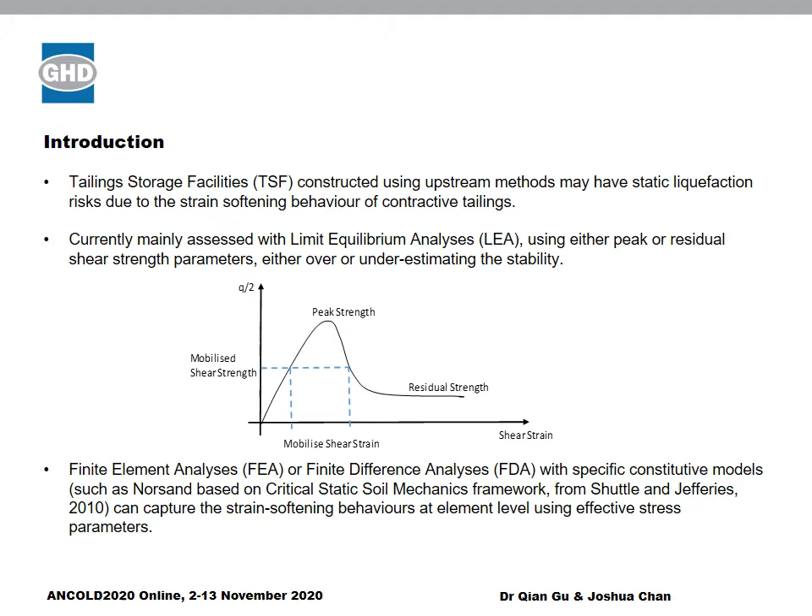The shear strength reduction method has been used by some finite element software packages to estimate the factor of safety values. Such method relies on progressively reducing the shear strength to trigger the loss of equilibrium. This process, however, cannot replicate the realistic strain and stress paths leading to failure. And considering the dependency of the engineering shear strength on actual stress and strain path, not considering the realistic path will mean that the actual factor of safeties under undrained conditions using effective stress parameters cannot be produced.

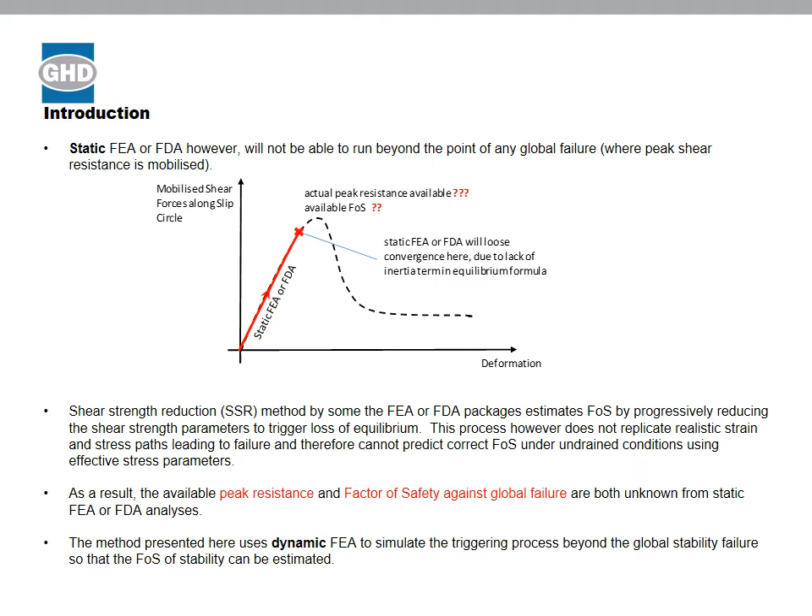The dynamic analysis has been undertaken using the software RS2, developed by Rocscience. The reason why this software is used instead of other more commonly used software such as FLAC and Plaxis is because of two things: first, this software is relatively user-friendly compared to FLAC; and secondly, compared to Plaxis, RS2 has got a NorSand model incorporated into it recently.

This is the cross-section used in the analysis. The TSF comprises a starter dam and 5 stages of subsequent raises. The current design also considered a smaller stage 1 buttress and a larger stage 2 buttress for increased stability.

The cross-section also shows a few locations along the embankment face, which will later on be used as output points to investigate the result. Also shown in the cross-section are a few pre-selected failure surfaces, which later on will be investigated for the factor of safety against failure.

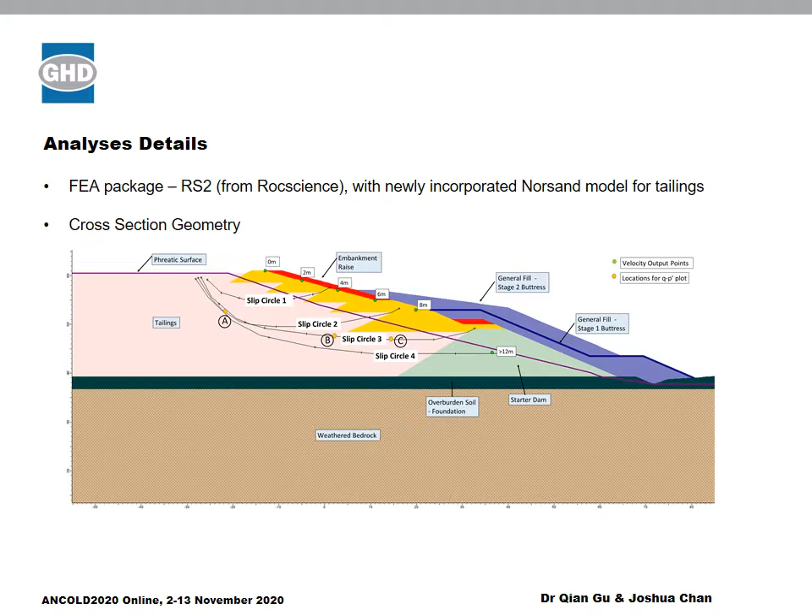Parameters of the tailings: it is mainly fine tailings with 70 to 85% fines, plasticity index between 6 to 10, SG between 3.08 to 3.36. In situ state parameter has been inferred to be between 0.1 to 0.175, suggesting mostly contractive behavior. Peak undrained shear strength ratio estimated to be 0.25, and the residual shear strength ratio estimated to be 0.11, based on the state parameter of 0.175 conservatively.

The CSL parameters are: first, limiting QP stress ratio under triaxial compression condition, 1.37; the intercept of CSL is 1.23; and the slope of CSL, in the e-log p space, is 0.24. Other NorSand parameters were inferred from calibrating the numerically predicted triaxial test result against the lab result, as can be seen from the next slide.

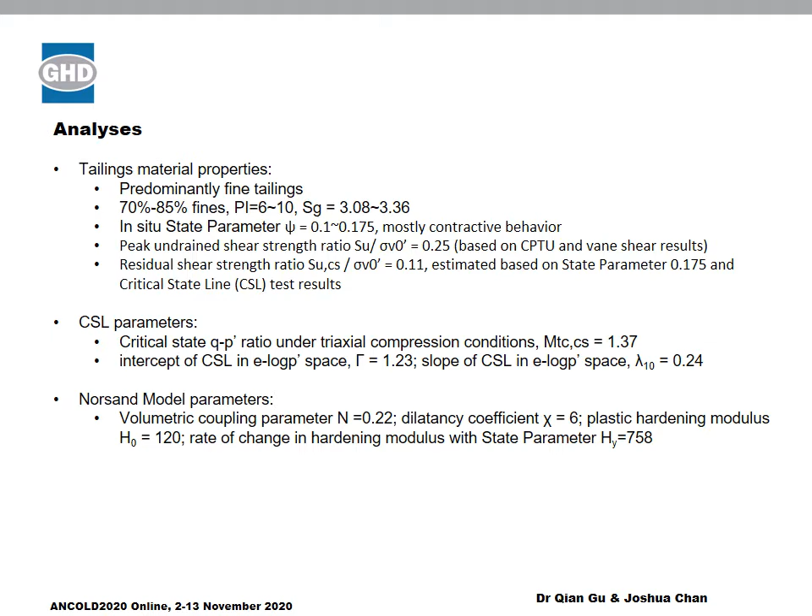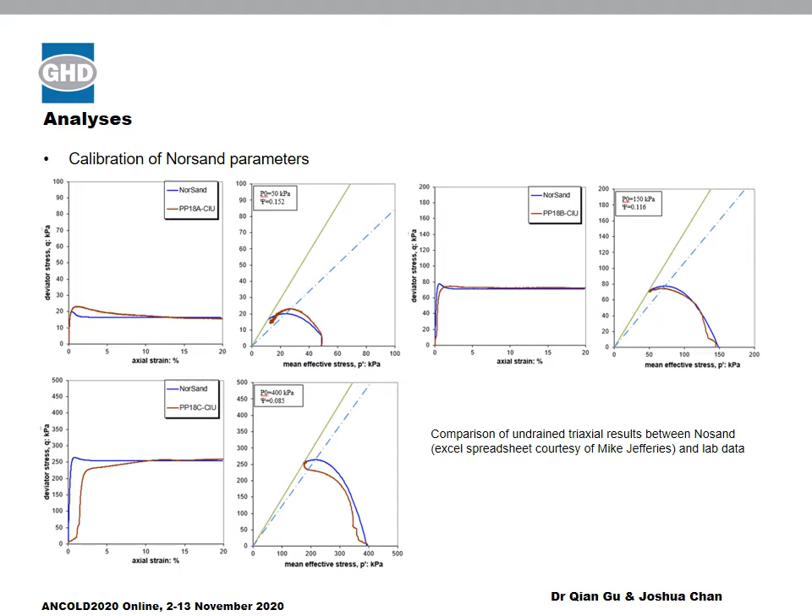This slide shows the comparison of numerically predicted triaxial results using NorSand parameters against the results from laboratory testing. As can be seen, all three sets of tests predicted using the same set of NorSand parameters match the laboratory test results fairly well. It should be noted that different consolidation pressures and different state parameters have been used for these three sets of tests.

The sequence of finite element modeling: first, the construction of embankment raises and also the tailing depositions are all modeled as fully drained stages using static analysis. After that, a series of dynamic undrained triggering analyses were performed in which surface pressure has been ramped up from 0 to 300 kPa in 9 stages.

At each stage, the pressure was increased linearly by 2 kPa per second, and then maintained at the same pressure level for 100 seconds. The duration of each loading stage has been selected so that the vibration effect can be minimized, while the total number of increments can still be kept at a manageable level.

The last feature is that during the undrained triggering process, the Q stress initially increases with shear strain towards the instability line, and once it's gone past the instability line, it starts reducing towards the critical state line, which represents the strength softening process.

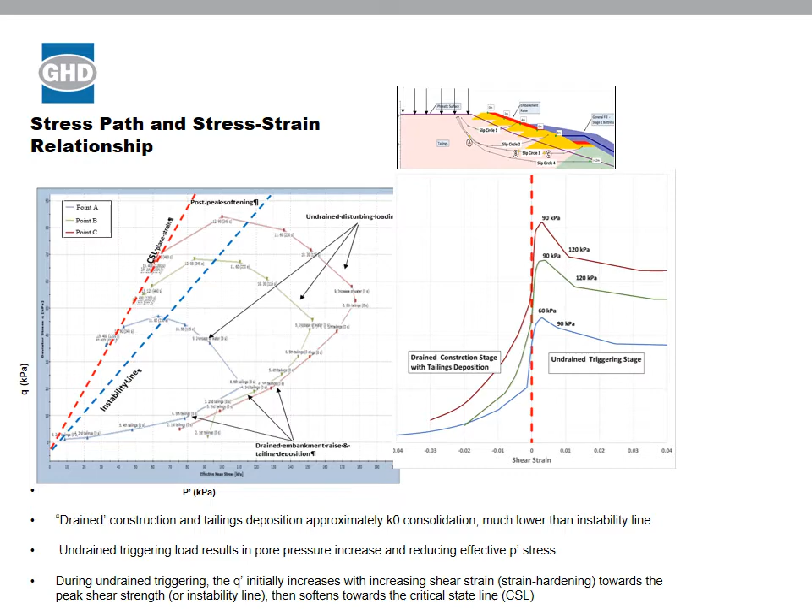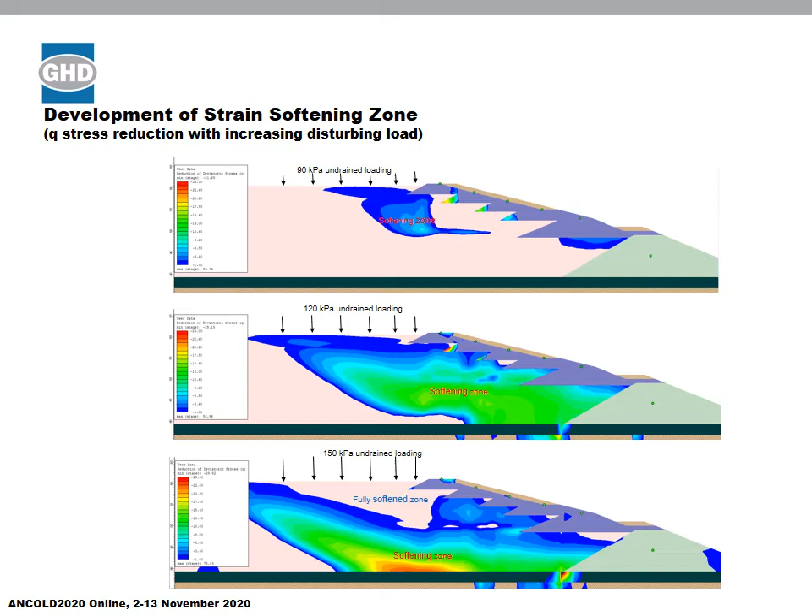The last slide showed the softening of Q stress with increasing disturbing force, and this one shows the softening of the effective P stress with increasing disturbing forces. Here the colors represent the P prime reduction ratio against the original P before the triggering process.

As can be seen, by the time the disturbing force increases to 150 kPa, most of the tailing materials beneath or behind the embankment have reached a reduction ratio of between 60 to 70%.

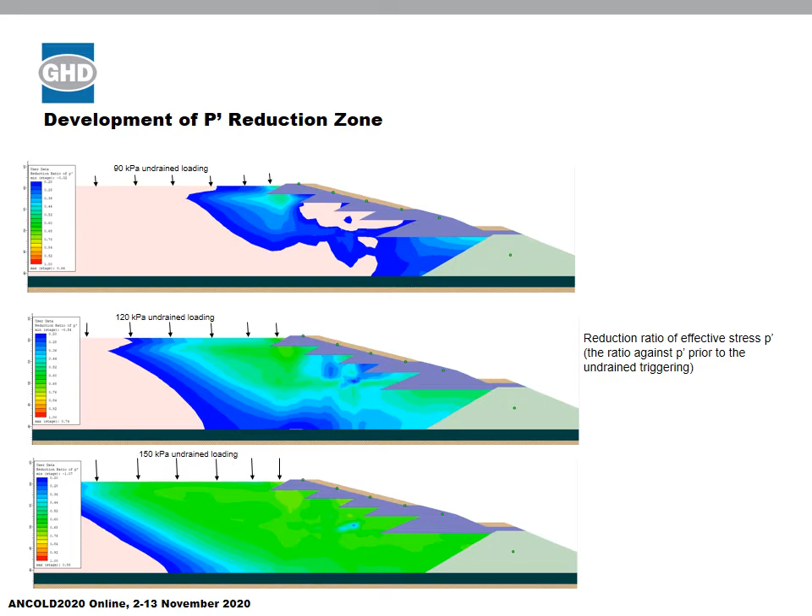Another question is how we can use the dynamic analysis to estimate the threshold undrained disturbance pressure, or the peak resistance available.

By raising the surface disturbing pressure in stages, such threshold disturbance can be identified by two methods. The first is by the appearance of a non-zero residual velocity when the disturbing surface load is maintained at a certain level. The second is by the peak shear stress mobilised along the potential failure surface with increasing stages of undrained disturbance. We will look at these two methods one by one in the following slides.

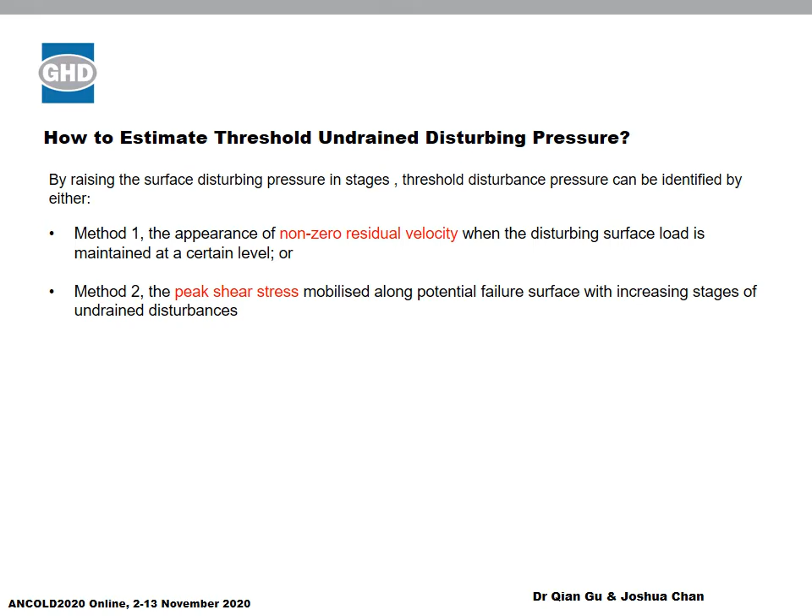This shows how we can estimate the threshold disturbing pressure using the first method. The figure here shows the relationship between residual velocity and different levels of surface disturbing pressure, at two locations: the first is at the crest of the embankment, called the 0 meter location, and the second is 8 meters below the crest of the embankment.

As can be seen, when the surface disturbing pressure increases beyond 90 kPa, non-zero residual velocity starts to appear, which suggests that a global failure along failure surfaces exiting at these two locations may occur when the surface disturbing pressure exceeds 90 kPa.

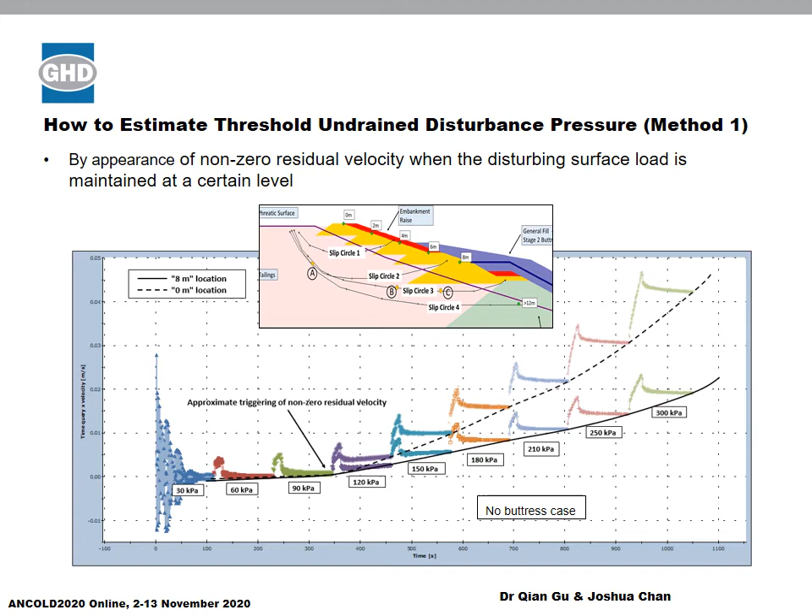The same trend can be seen more clearly when we plot the residual velocity against different triggering pressures at different depths for cases with no buttress, stage 1 buttress, or stage 2 buttress. The first figure on the left is the case without buttress. As can be seen, the triggering threshold pressure is around 90 kPa for all failures. When stage 1 buttress is in place, the triggering pressure for deeper failures increases to 110 kPa, and when a bigger stage 2 buttress is in place, any failure deeper than 8 meter depth has a triggering disturbing pressure that increases to 150 kPa.

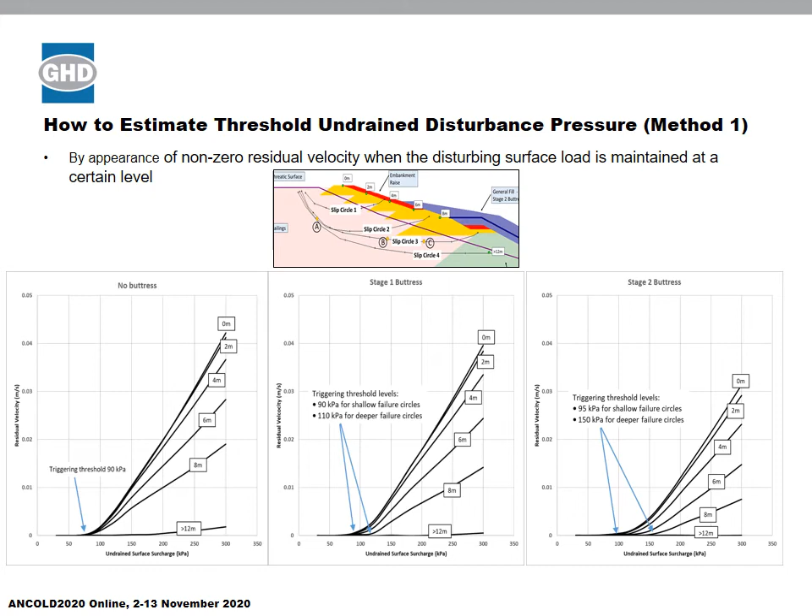When we plot all the results into a single figure, we can see clear relationships between the threshold disturbing pressures against the depth of slip surfaces for different scenarios. In general, the threshold surface disturbing pressure will increase with the depth of slip surfaces.

But it's interesting to note that there's essentially no difference between the two curves representing the no buttress case and the stage 1 buttress case for any failure shallower than 8 meter depth. This is not surprising, considering that the top of stage 1 buttress is actually 8 meters below the top of the embankment. Therefore, any failure shallower than that would not be improved by having stage 1 buttress.

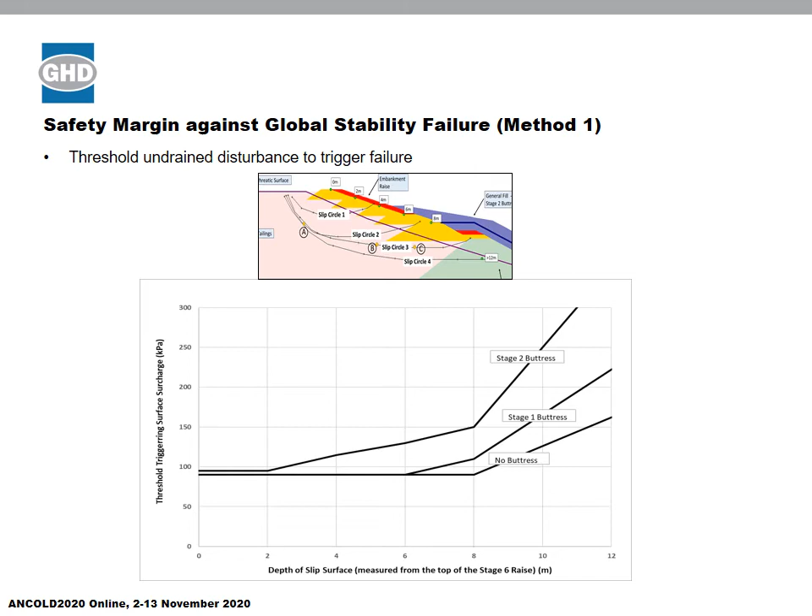The threshold surface disturbing pressure and peak resistance available can also be identified by looking at the mobilized shear stress along pre-selected failure surfaces. This figure shows the shear stress averaged over the entire length of potential failure surfaces with increasing level of surface disturbance for different scenarios.

It can be seen clearly that for all scenarios there are threshold disturbing pressures that can be identified at which the peak mobilized shear strength is mobilized. What's more important to know is that those threshold disturbing pressures identified using this method are identical to those identified using the non-zero residual velocity method discussed previously.

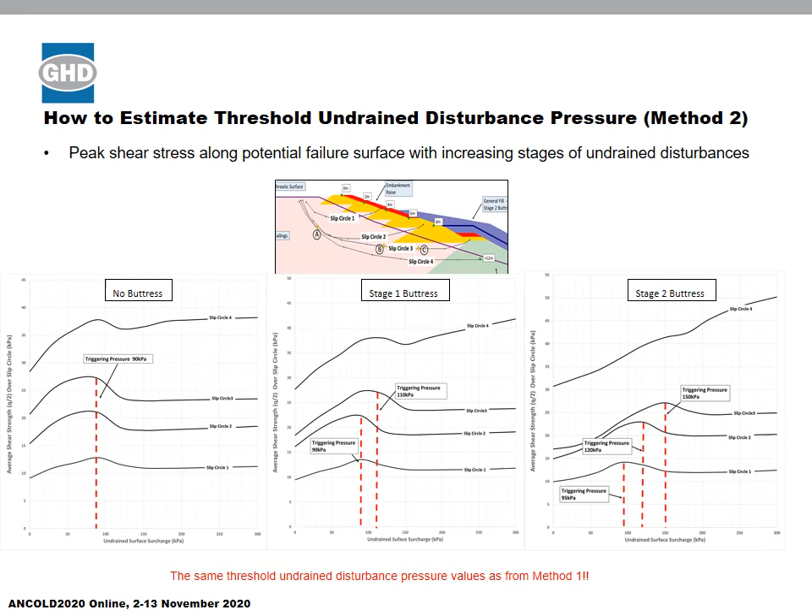In addition to predicting the surface disturbing pressure, method 2 also allows the factor of safety values to be predicted. The factor of safety can be defined as the ratio between the peak mobilized shear strength and the shear strength mobilized when there's zero surface disturbing pressure.

The values predicted by this dynamic FEA are between 1.3 to 1.6 for different scenarios and different failure surfaces at different depths. Such values are well within the range predicted by the LEA method, which is between 1.2 to 2, and this is not unexpected.

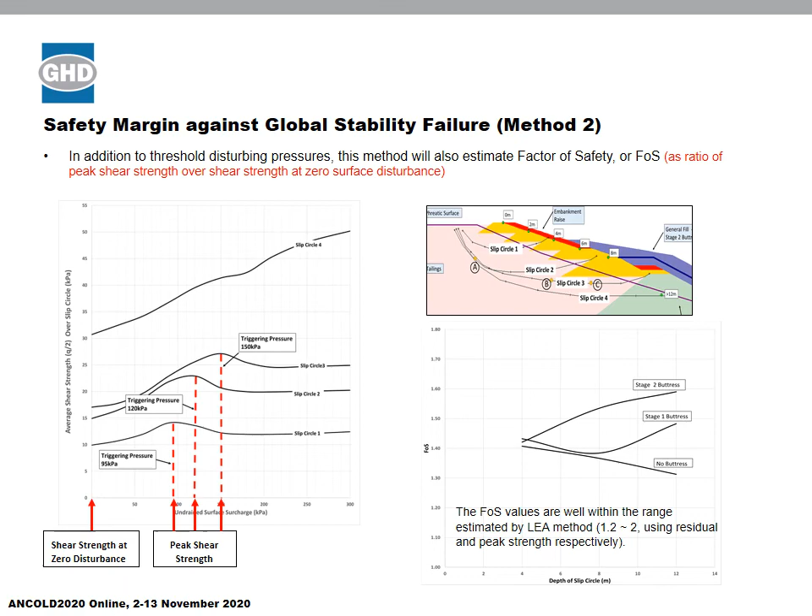So this brings us to the conclusions of this study. Firstly, dynamic FEA analysis using the NorSand model can be undertaken to capture the failure mechanism, including strain softening behaviors of contractive tailings.

Secondly, the loss of embankment stability or the initiation of progressive failure can be identified by either the appearance of a non-zero residual velocity or by a peak in the mobilized shear strength averaged along the potential failure surfaces. The estimated threshold disturbing pressures are the same from either method.

The method can estimate not only the threshold disturbing pressures, but also factor of safety values against global stability failure. Compared to the limit equilibrium method, the current method has the potential to reduce uncertainty in the estimated factor of safety values, resulting in cost savings.

There are also some thoughts about future works. First, currently only the failure scenario triggered by upstream loading has been investigated, while in reality other failure mechanisms may also occur due to such things as downstream toe excavation, phreatic level increase, or foundation creep, etc. All these different failure mechanisms could have different safety margins and therefore should also be investigated.